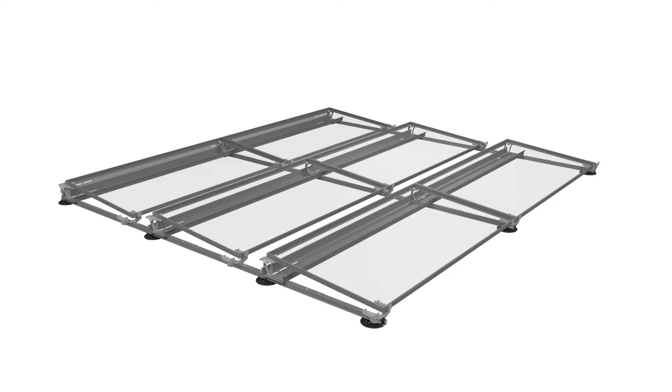This video tutorial will demonstrate the assembly of Gridflex 5 and how its main features can help with fast and simple installation. Let's begin with one of the primary components, the rail assembly.

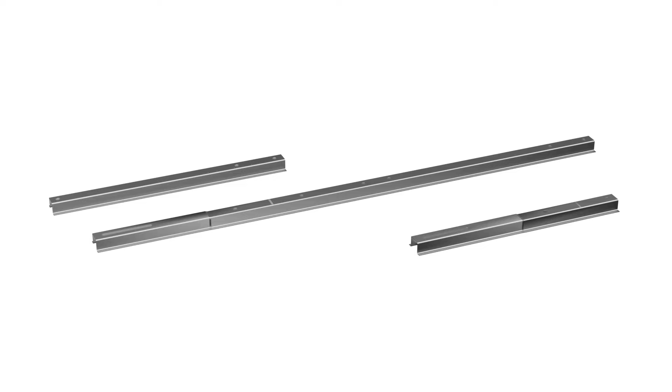The Gridflex rail system is based on three different rail components that fit together: a north and south rail that sit at opposite ends of a rail assembly, and a mid-rail that can be positioned between them. Multiple mid-rails can be attached to each other, allowing for as many module rows as are needed in an array. These rails connect with a 1/2-inch bolt through the slots on top.

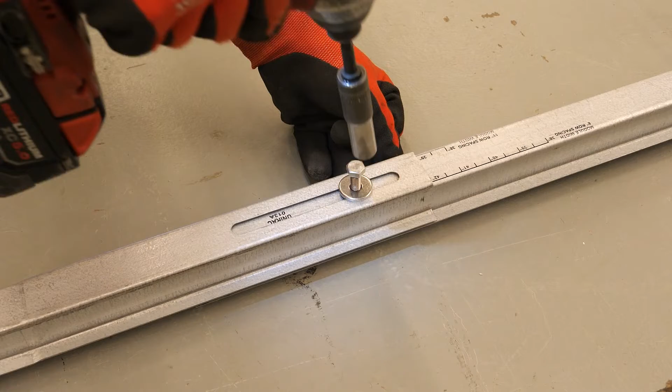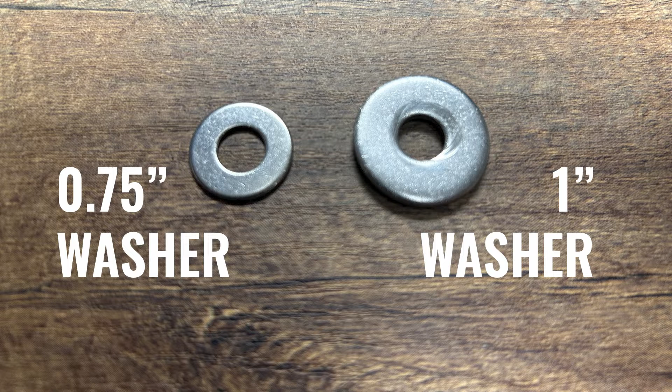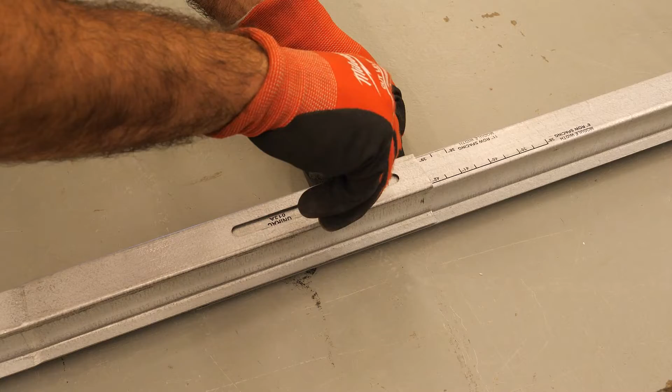It is important to note that while the Gridflex 5 system only uses 1/2-inch bolts throughout, it uses two different washer sizes. For connecting the rails, be sure to use only 1-inch outside diameter washers. To eliminate the risk of stripping the bolt, all bolts should be started by hand, then tightened into place with an impact driver.

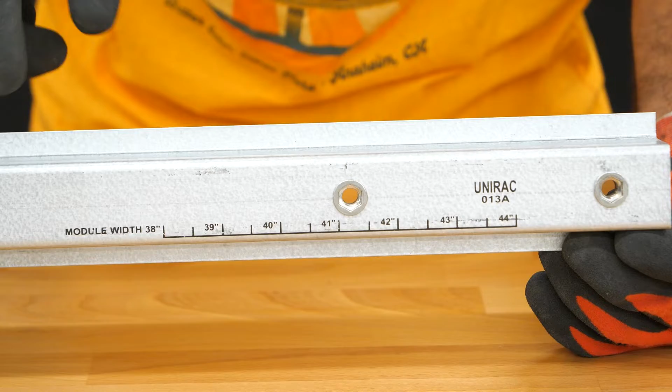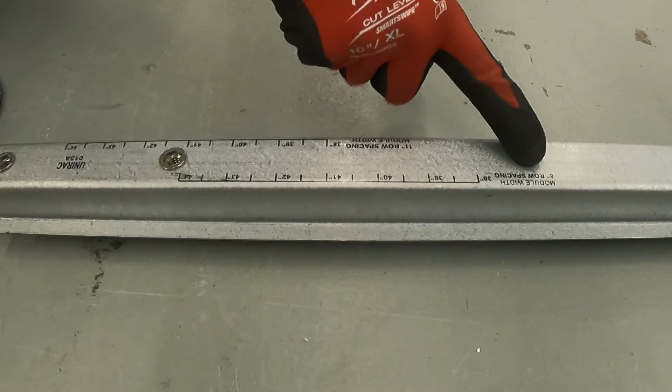The north and mid rails are stamped with a module width measurement assist. These are to help determine the point at which rails must overlap to accommodate the size of panels being used. For example, if the modules are 38 inches wide, then the overlapping rail will be placed with its end precisely at the 38-inch measurement mark stamped on the rail below it. Also, there are two scales at the end of the mid-rails, one used to produce a 6-inch row spacing, the other for an 11-inch row spacing.

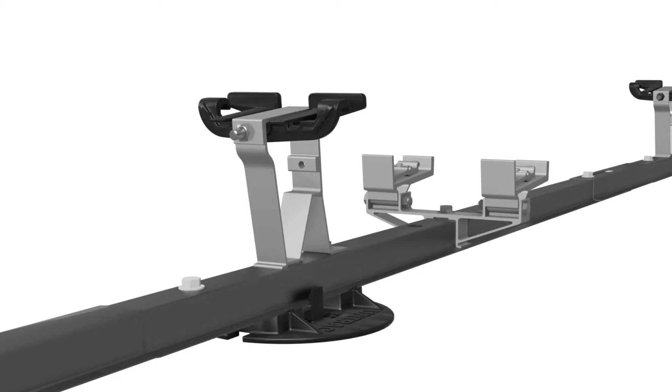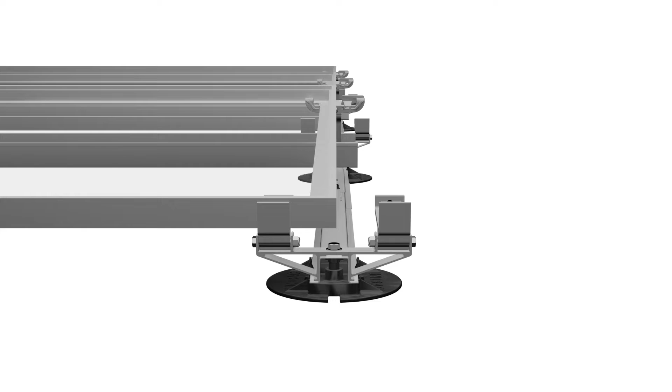As the rail assemblies are placed down and bolted together, the roof pads will snap into the bottom, lifting and supporting them from the roof surface. Roof pads must sit beneath every north stanchion in the system, but only beneath the first front row of south stanchions. Consult the array layout documentation to find accurate placement. Rails at the east and west boundaries of the array can be brought in about 6 inches, so that the entire assembly will sit beneath the panels.

Lay the ballast trays across the rails perpendicularly, and align the slots with the holes in the base rail. Secure it down with a bolt and a 0.75-inch outside diameter washer.

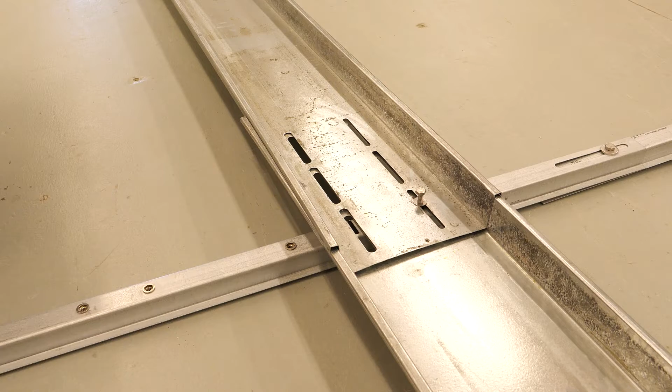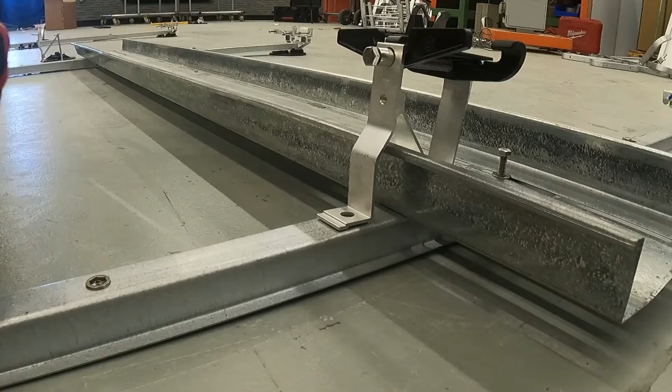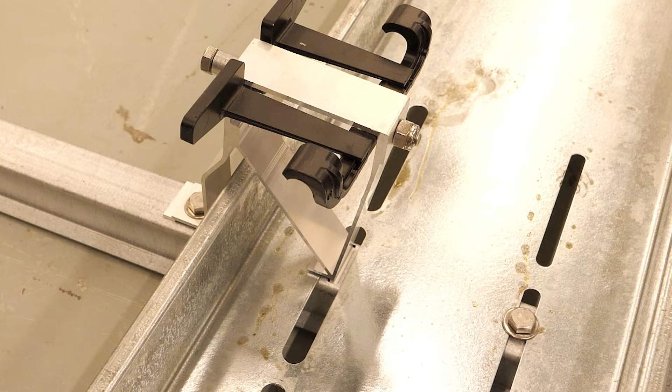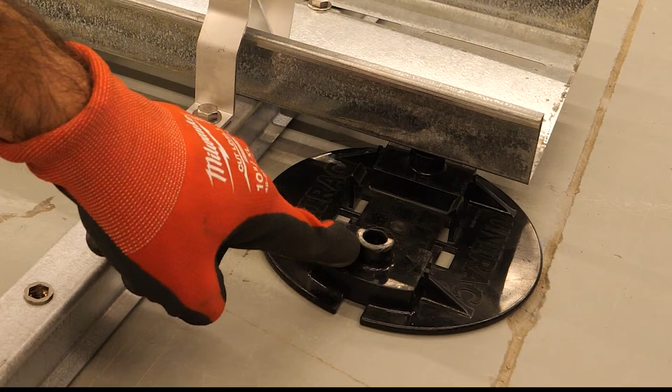Attach the north stanchions by inserting the front tab into the rail slot through the ballast tray, behind the bolt that was just attached. Swing the back of the stanchion down to the rail, meeting its attachment point to the bolt hole in the base rail. Secure it down with a bolt and a 0.75-inch outside diameter washer. To allow for micro adjustments later in the installation, it is good practice to leave these bolts loose at this stage. Remember to clip a roof pad beneath every north stanchion. The bolt should sit inside of the rear protrusion of the pad.

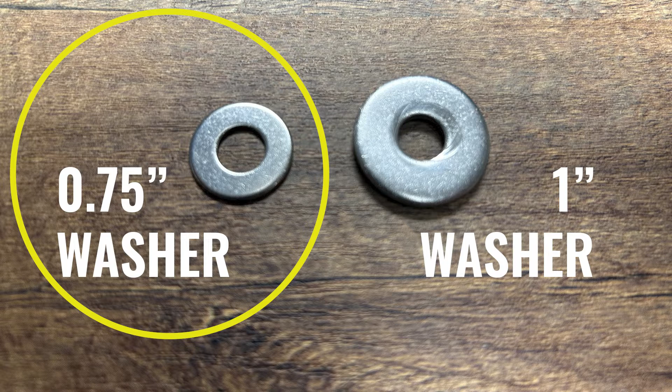Attach the south stanchions to the base rail at the appropriate attachment point, which is determined by the row spacing required for the system. It will fit over the rail body. Make sure that the stanchion is facing the correct direction and attach it with a bolt and a 0.75 outside diameter washer. Remember that only the front row of south stanchions will have a roof pad placed beneath them, with the attachment bolt seated directly into the front protrusion.

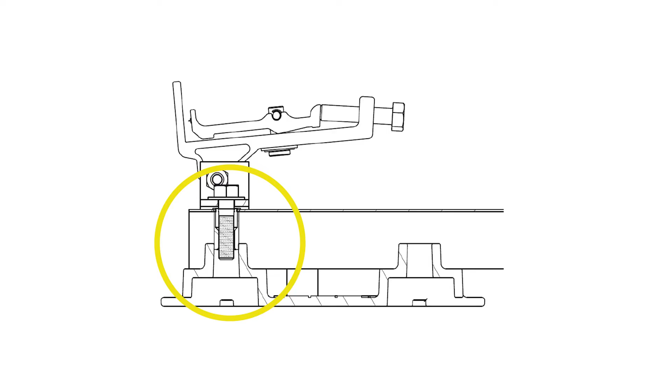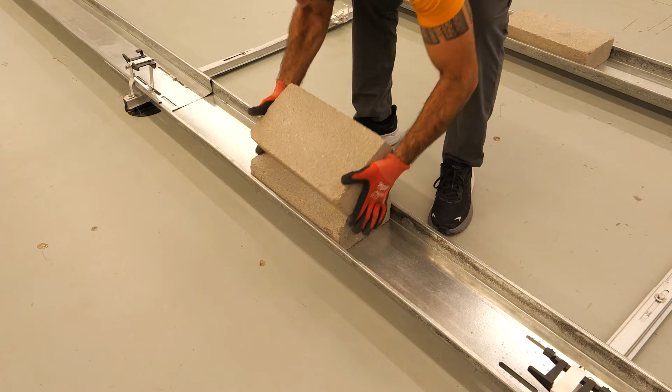A quick side note about roof pads. They can be stacked as high as 4 pads beneath the rail to achieve additional lift against the roof surface. Ballast blocks can be placed into the trays once all of the stanchions are attached. The base of the Gridflex 5 system has successfully been assembled. Next comes installation of the modules, followed by the wind guards.

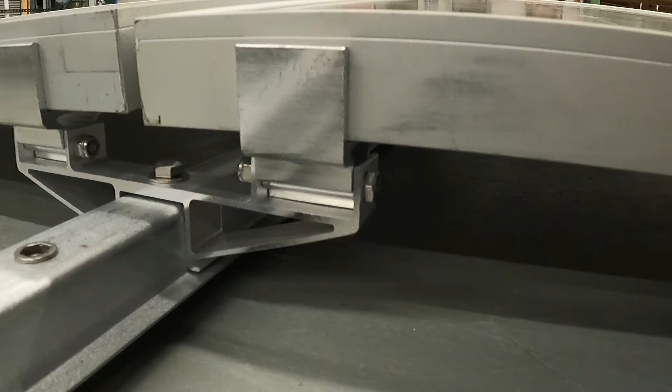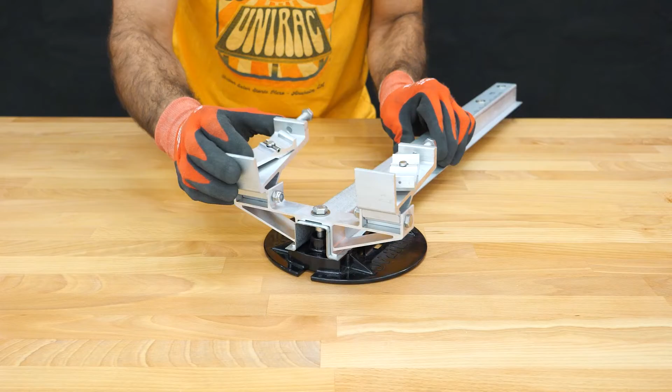The anatomy of the south stanchion is important to understand. One stanchion can hold 2 modules, each side holding one module south edge. The saddle swings up and down, while the keeper swivels in a circular motion inside of it. At the top of the saddle is the attachment hex bolt, and on the end of the keeper is a bonding pin that will bite the return flange of the module.

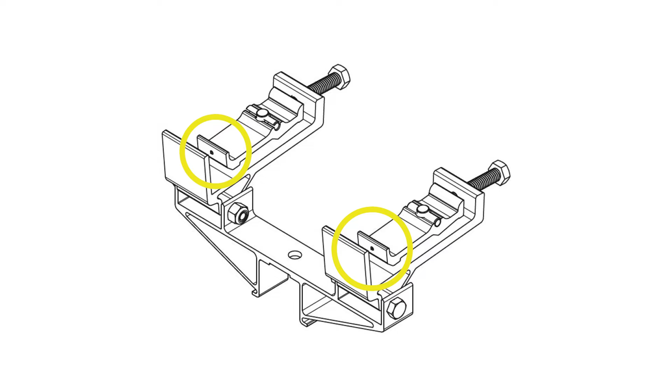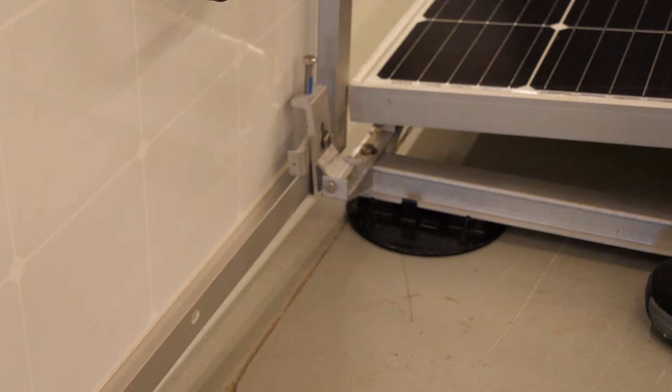Swivel the keeper perpendicularly to the saddle and pull it towards the hex bolt. Swing the clamp up and place one end of the module into the clamp. The edge should be sitting on the bottom jaw of the clamp. Rotate the keeper toward the module and tighten the hex bolt. This will press the keeper and its bonding pin into the wall of the vertical return flange of the module. Do this for both clamps holding the module.

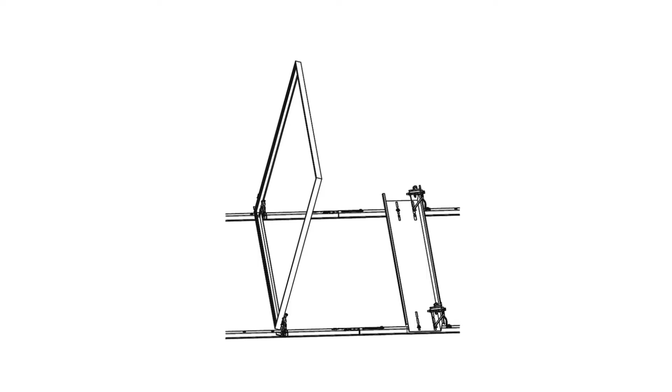In this position, with the module standing up on its edge, wire management can be done most easily and effectively. Secure the wiring before laying down the module. With the south edge of the module secured, the north edge can swing down to rest on the north stanchions.

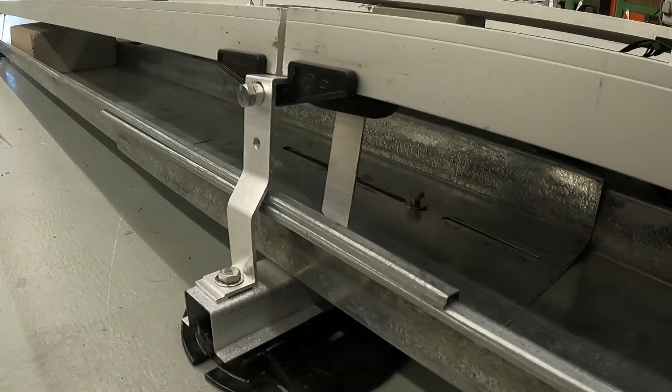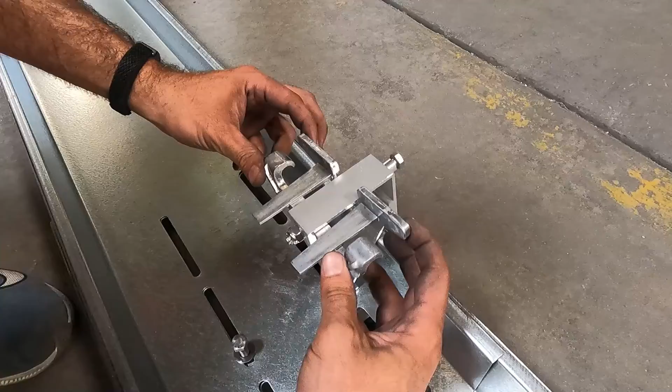Just like the south stanchion, the north stanchion is designed to hold the edges of two modules, one on each side. It is designed with two spring-loaded wings on each side of a central aluminum support base. The base is a shared structure, meaning that two panels must land on it evenly when placed. The spring-loaded wings will be positioned against the outer edge of the panel frame. The hook will be positioned inside the return flange. Once both panels are laid down, the bolts can be tightened so that their edges are gripped between the hook and the wing of the stanchion.

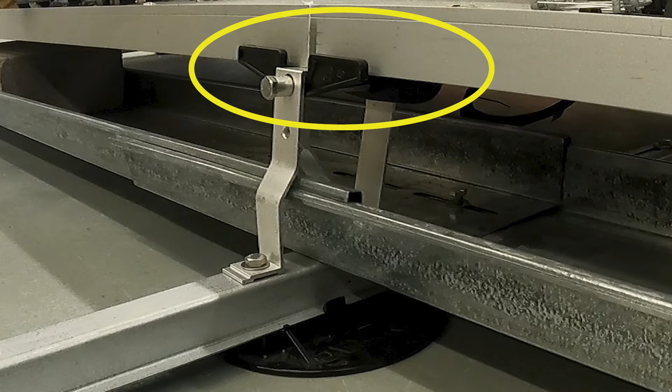It may be the case that an adjustment in alignment is needed to make certain that both panels are supported by the central base of the north stanchions. This is why it is a good idea to leave the bolts that attach the stanchions to the rails a bit loose. Once adjustments are made, these bolts can be completely tightened with an impact driver.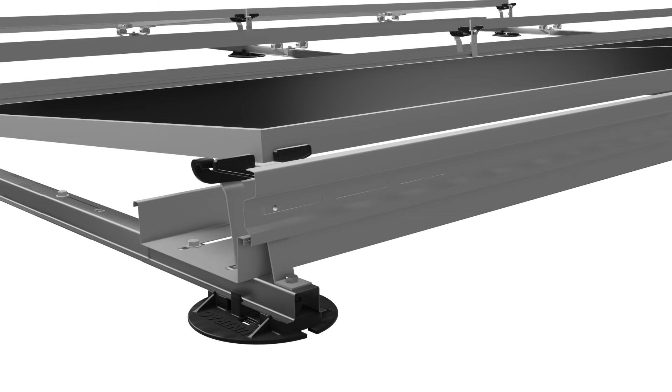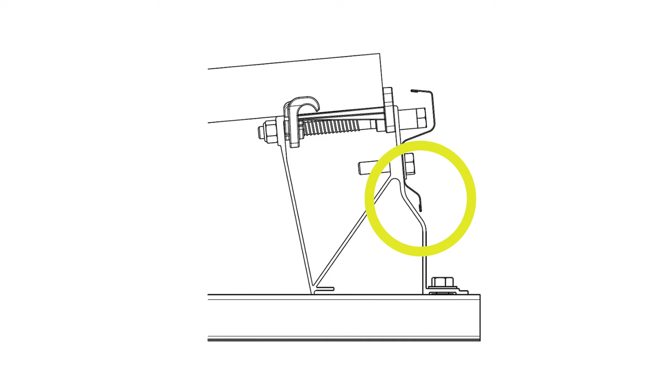Wind deflectors can now be installed. Position them along the north edge of a module row against the north stanchions, aligning the attachment point with the open slot. The narrow side of the deflector will be on the bottom. Thread bolts through the slots and into the bolt hole. Be sure that you are also using a 0.75-inch outside diameter washer.

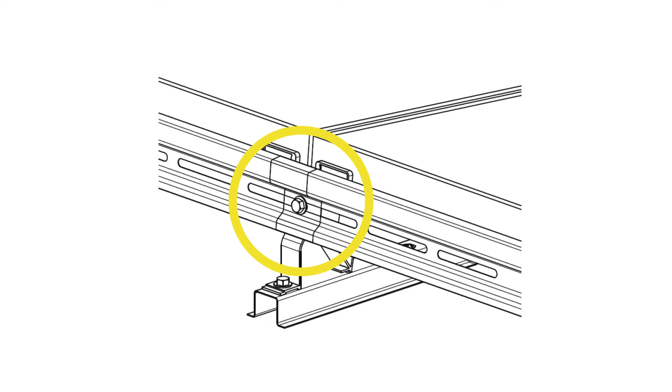Wind deflectors will overlap where modules meet. Both will be secured by a bolt and a 0.75-inch outside diameter washer. For perimeter modules, align the outside edge with the exposed edge of the module. Complete this process throughout the entire array, and you will successfully install the Gridflex 5 solar energy system.